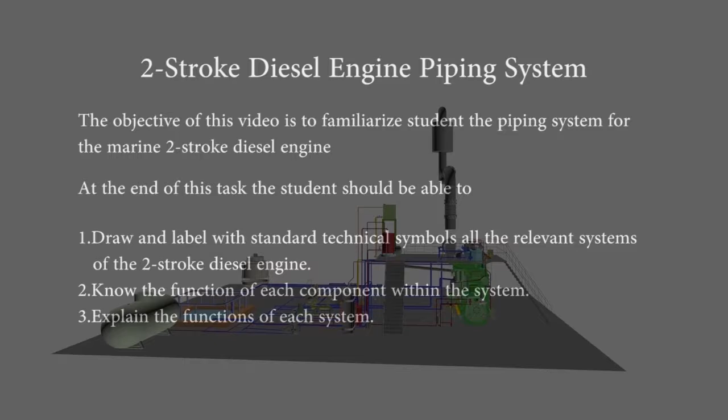Two-stroke diesel engine piping system. The objective of this video is to familiarize students with the piping system for the marine two-stroke diesel engine. At the end of this task the student should be able to: 1. Draw and label with standard technical symbols all the relevant systems of the two-stroke diesel engine. 2. Know the function of each component within the system. 3. Explain the functions of each system.

The two-stroke diesel engine consists of these systems: 1. The jacket cooling water system. 2. The fuel injection valve cooling system. 3. Main lubricating oil system. 4. Piston cooling system. 5. Rocker arm lubricating oil system. 6. Liner lubricating oil system. 7. Turbocharger lubricating oil system. 8. The fuel oil system. 9. Scavenge air system. 10. The starting air system. 11. Exhaust system.

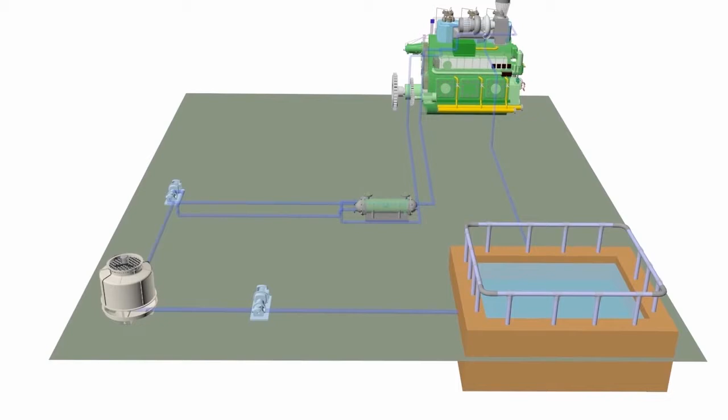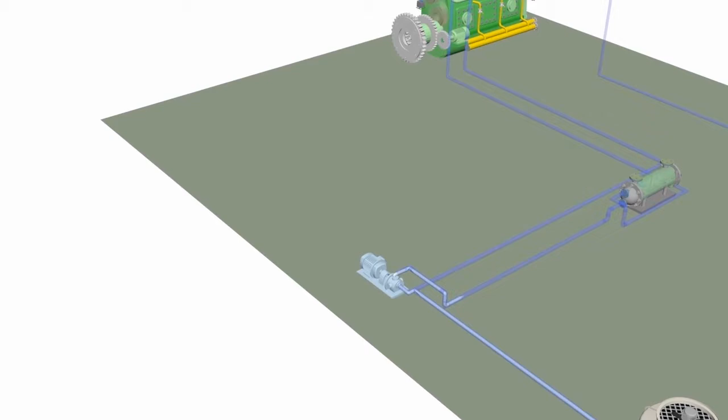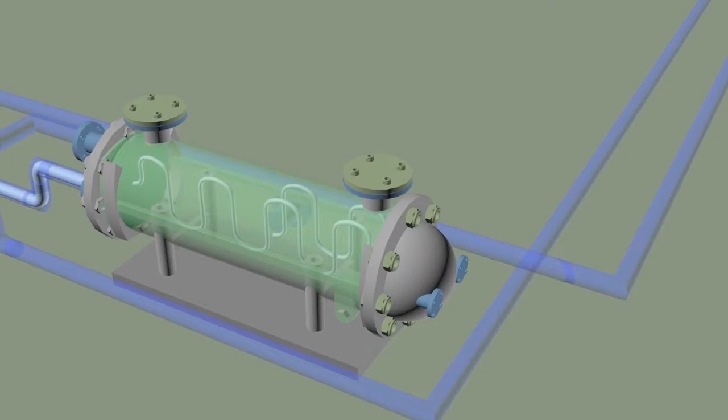The jacket cooling pump, of a centrifugal type, pumps the jacket cooling water to the L.O cooler where it cools down the lubricating oil of the main engine. The freshwater system also plays an important part in cooling the main engine jacket cooling system, where it will flow through the piping system through a manifold located behind the cylinders of the main engine.

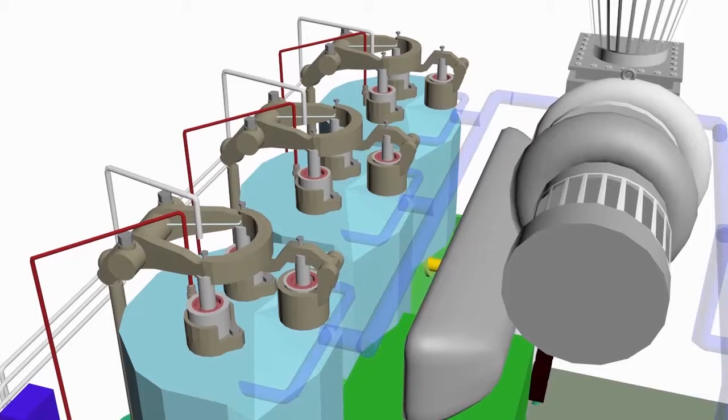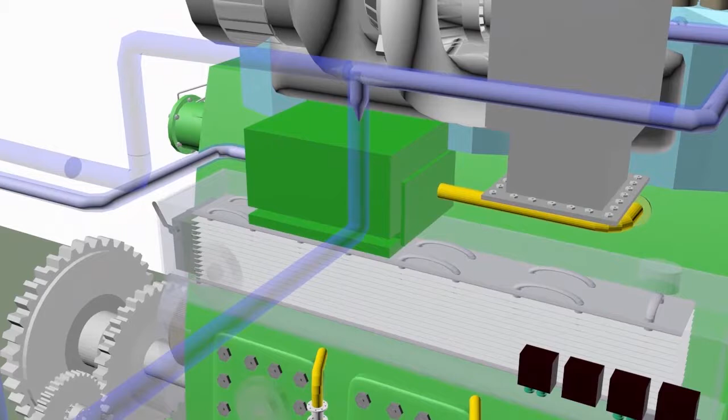It is then diverted to the cooling path of the liner, where it will flow to the cylinder head for cooling of the cylinder head system, then flow out to a series of ports, which then flow to the water reservoir, which completes the cycle. Apart from that, if the temperature is still cool enough for the system, it will return back to the suction line of the jacket cooling water pump. This temperature and pressure is monitored by various thermometers and pressure gauges.

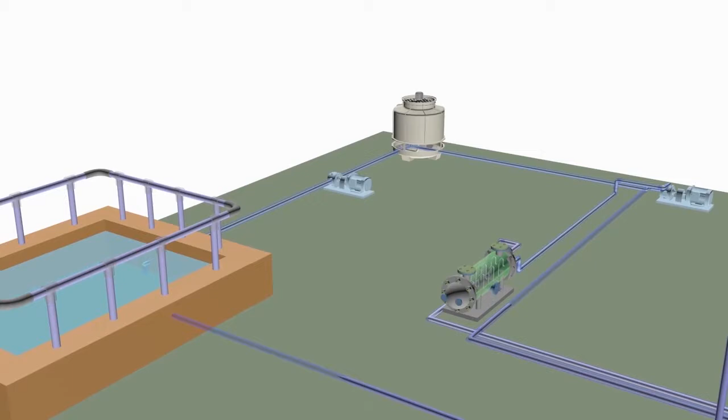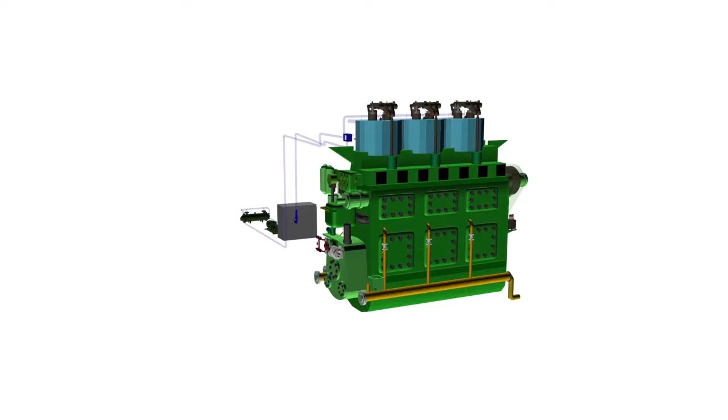Fuel injection valve cooling system. The fuel injection cooling unit is used for cooling the fuel injection nozzles of the diesel engine, to keep the diesel nozzle automatically and lastingly cooled by circulating water or oil through cooling passages. Heavy fuel injectors are fitted with water-cooled nozzles.

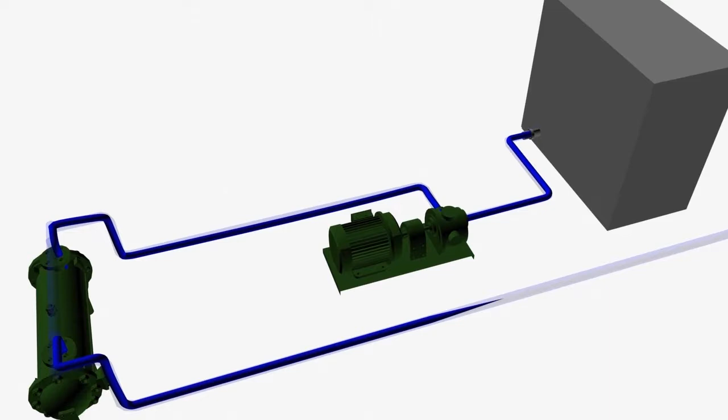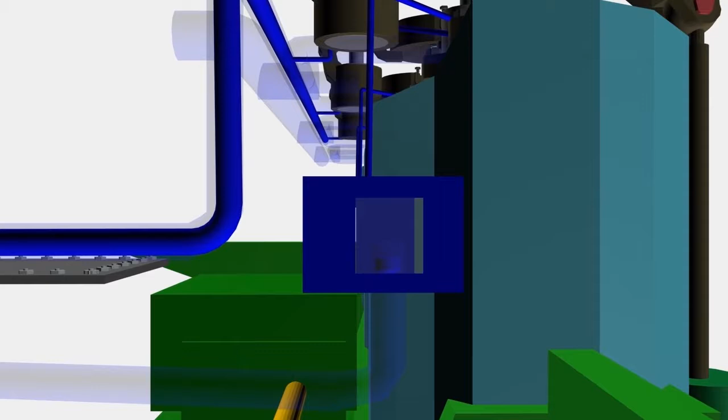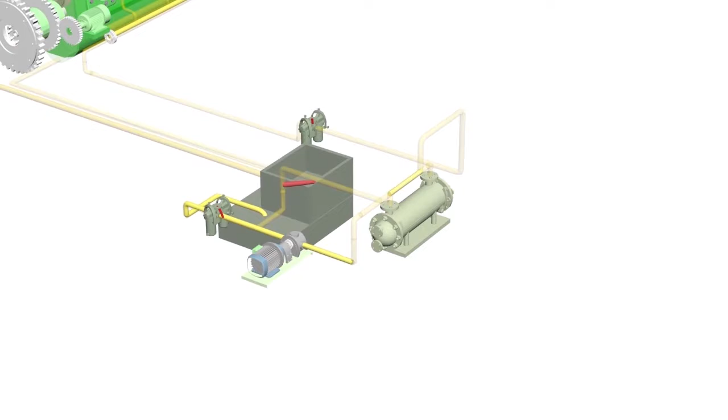Main lubricating oil system. The main lubricating oil system comes from the main engine lubricating oil sump tank. This oil in the sump tank is pumped by the gear pump through a series of filters, where it then goes to the lubricating oil cooler. This system is also fitted with an emergency lub oil pump to prime the lubricating oil so that it will fill the line before starting the main lubricating pump.

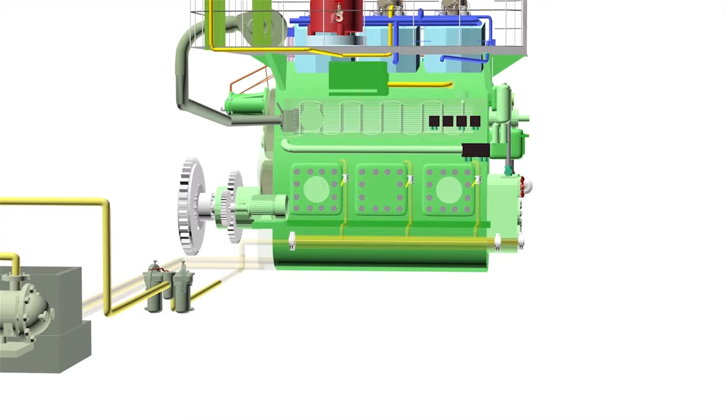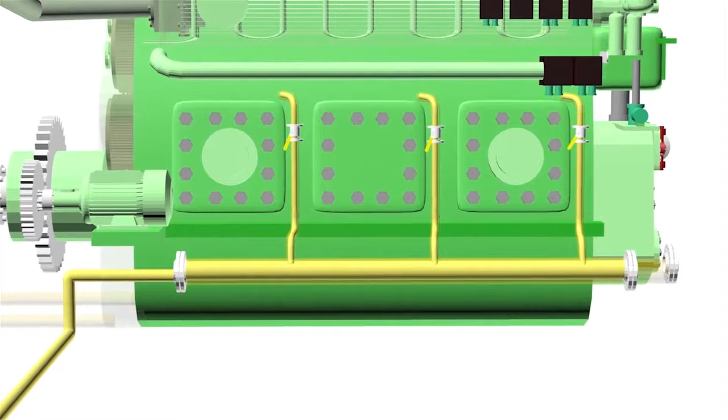When the lubricating oil enters the cooler, it will be cooled by the fresh water system that is used to cool the jacket cooling system. After passing the controlling valve, the oil will then be filtered by a second filter to ensure that any remaining particles are screened off. The oil is then passed to a main pipe where it will enter the main engine to lubricate the main bearings and crank pin bearings of the main engine.

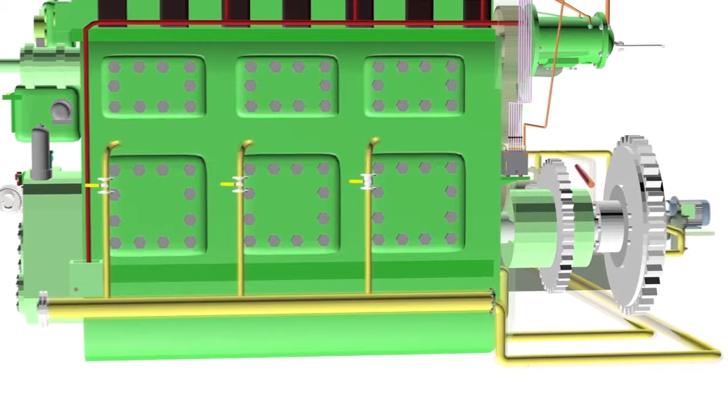It will then flow back by gravity to be collected in the dry sump tank, where a pipe will flow back to the main lubricating oil sump tank. Also, oil returns from the gearbox to the sump tank. Throughout the system the temperature is monitored by a series of thermometers, thermocouples and pressure sensors.

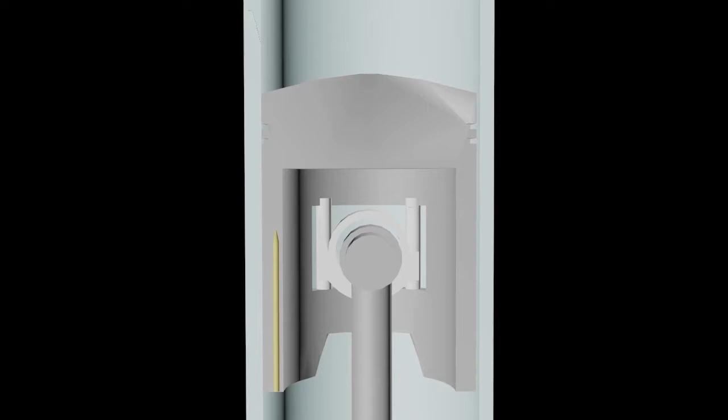Piston cooling system. The piston cooling system is used for cooling the piston crown to absorb heat incurred by the piston. The piston cooling system is a part of the lubricating system of the main engine. The lubricating oil which flows to the main engine lubrication system is diverted to a series of pipes where it enters the telescopic pipe from the underside of the piston.

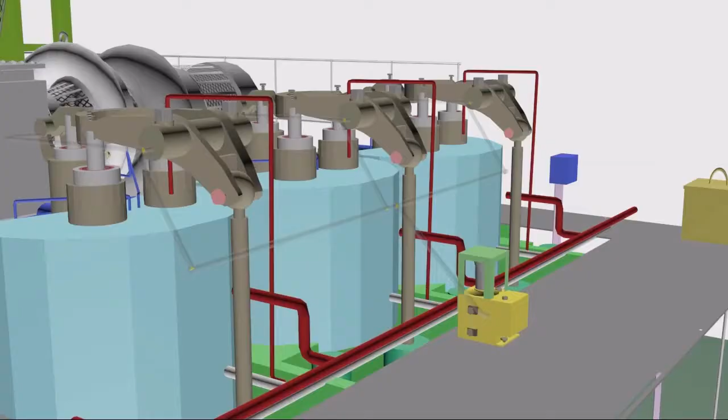Rocker arm lubricating system. The rocker arm lubrication is to provide fluent movement of the rocker arm by providing sufficient lubrication to moving parts such as push rods, bearing bushes, the push rod's ball ends, the rocker arm bearings and the ends of the valve stem.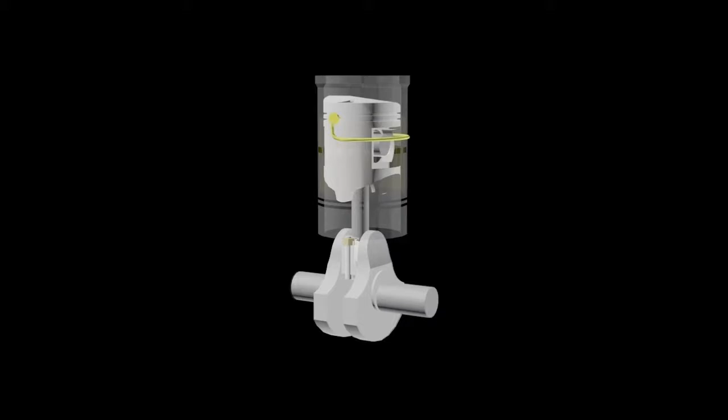The lubrication oil will be sprayed at the internal liner surface and the scraper ring, and will eventually be burned during the combustion.

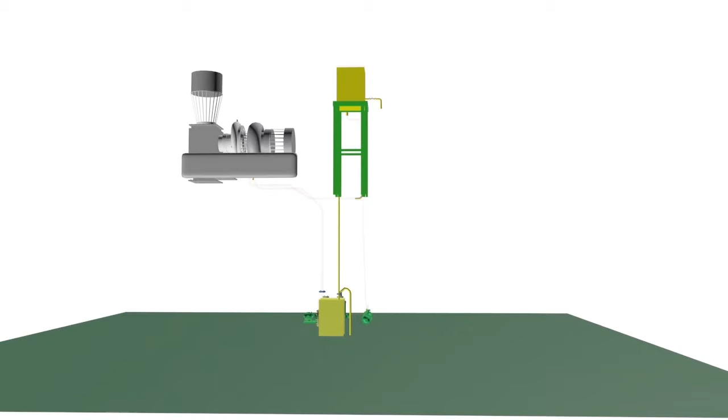Turbocharger lubricating oil system. The turbocharger lubrication is supplied either by an external or internal pumping system. The external system requires a positive displacement pump to supply oil from an external holding tank to lubricate the turbocharger bearings running at high speeds. It is very important that the lubricating oil is clean and free from metal particles that could scratch the bearings.

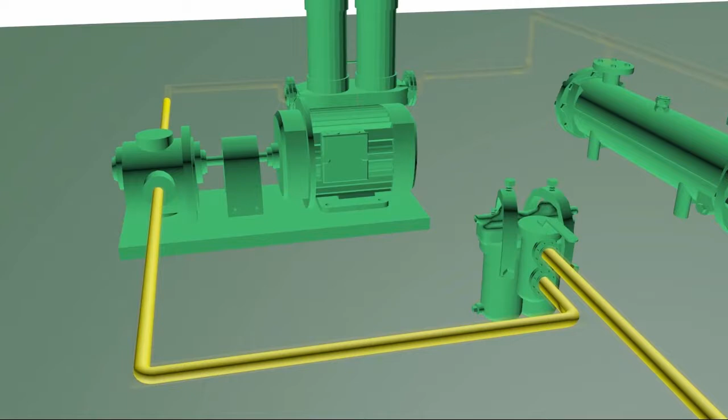The turbocharger lubricating oil system starts with oil from the overflow tank, which is pumped by a gear pump to a series of duplex filters of magnetic type. The system is fitted with a gravity tank high above the turbocharger to ensure that at all times oil will remain inside the pipe. This is to ensure that no air can ingress into the system, creating an airlock.

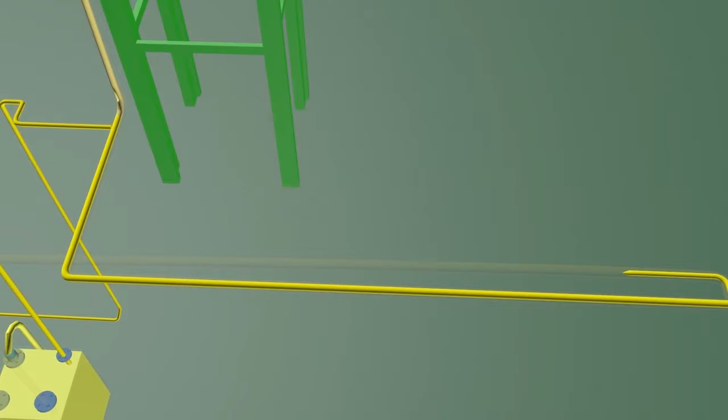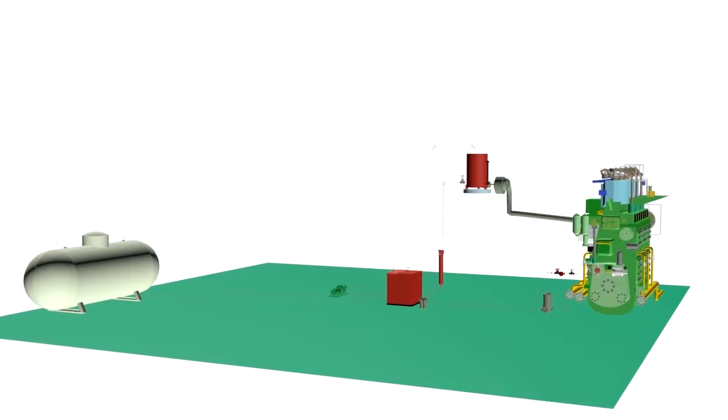Fuel oil system. Marine fuel quality can significantly affect the performance, operation and maintenance of the diesel engine. To better understand the important effect of diesel fuels on the engine itself, it is important to have a basic understanding of fuel characteristics, properties and contaminants which impact the operation of a diesel engine and its fuel handling and

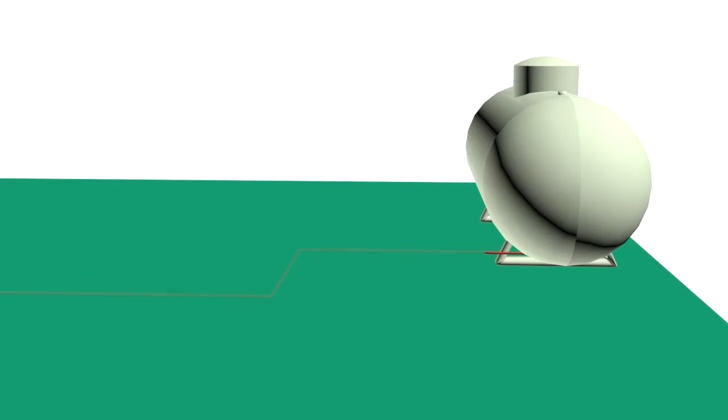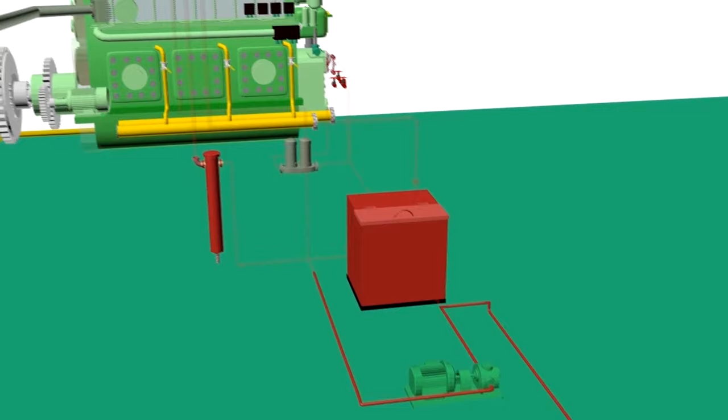fuel treatment systems. The fuel oil system for a diesel engine can be considered in two parts, which are the fuel supply and the fuel injection systems. The fuel supply of this plant starts from the fuel oil storage tank, where it will be transferred via a fuel oil transfer pump to a gravitational fuel oil service tank.

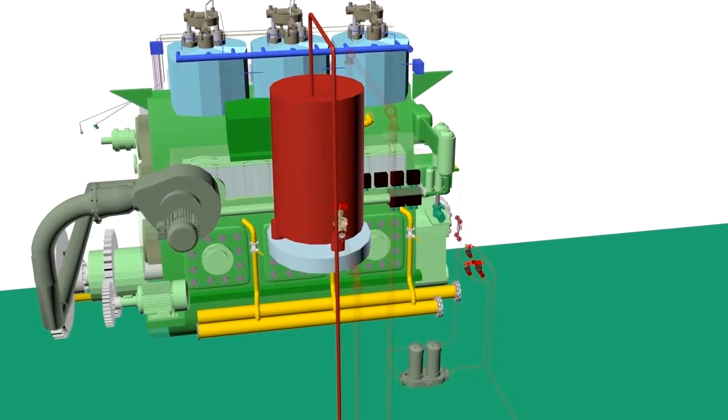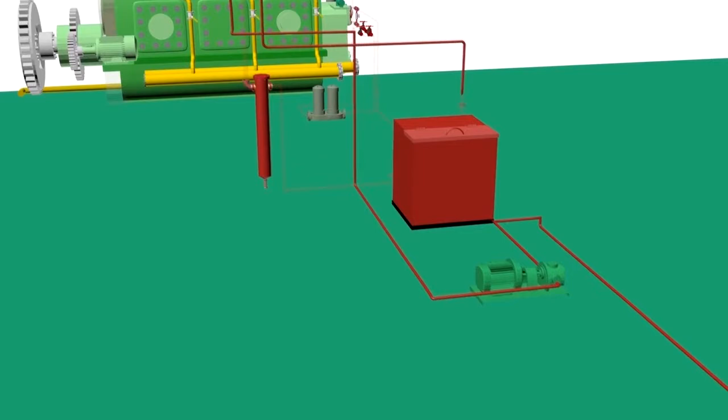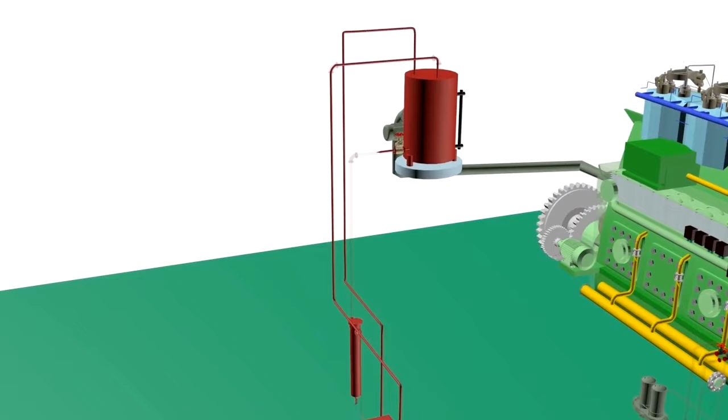In the event that the fuel oil is high, it is found in the sight glass. Overflow pipes are fitted to direct the excess oil back to the oil overflow tanks. The system starts when fuel from the service tank flows down by gravity to a deaerator which separates the fluid and air to prevent airlock of the system.

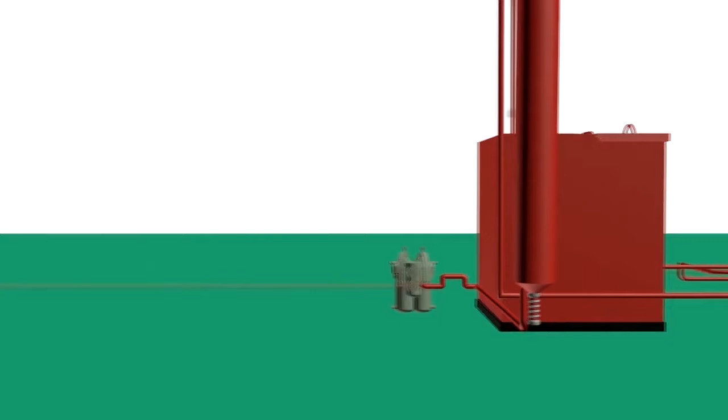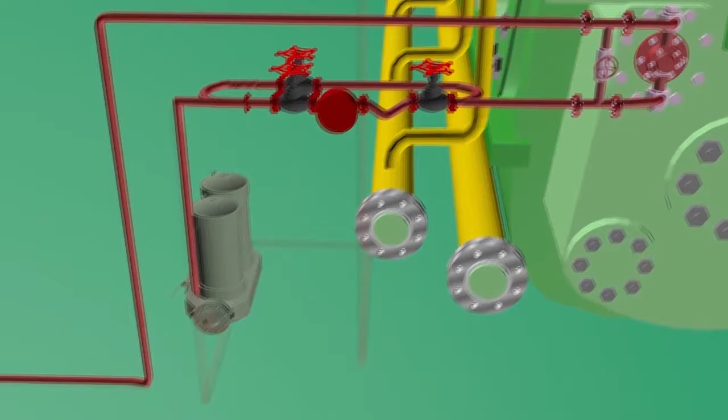During operation the oil is pumped by a gear pump which is attached to the main engine, driven by a set of running gear through the main engine gearing system. Fuel oil will then pass through a series of duplex strainers to clean any particle matter that could choke the fuel injector. After passing through the service pump it will pass through a flow meter where fuel consumption is monitored. A second duplex cleans the fine metal and sludge from the fuel oil system.

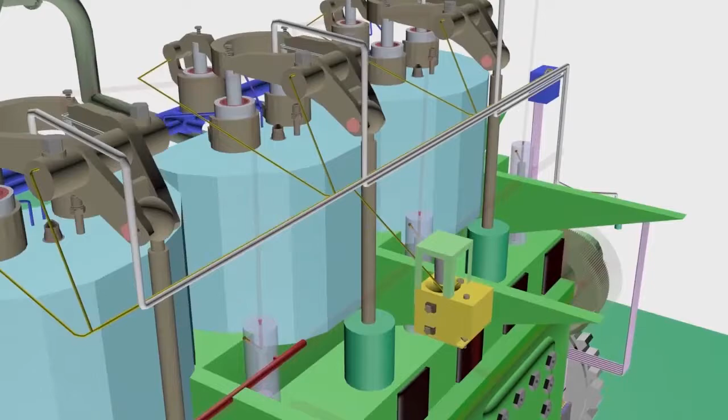This oil will then pass to the fuel injection pump where the pressure will be raised to the fuel injection valve located in the center of the cylinder head. The fuel injection pump is operated by a set of camshafts driven by the gearing system at the end of the engine chain drive. This pump is controlled and regulated by the governor through a series of linkages that set the amount of fuel supplied to the injector, and as a result the speed of the engine.

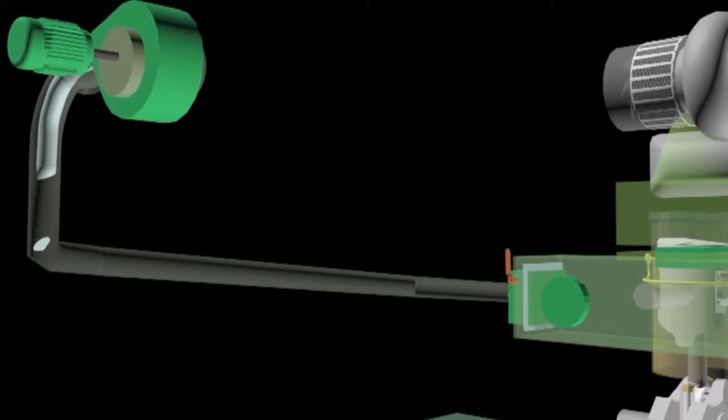Scavenge air system. Scavenge air is provided by an auxiliary blower when the engine is running at slow speed. The auxiliary blower, driven by a motor at high speed, delivers air to a damper, which then will enter the scavenge space before it enters the scavenge port. After passing the port, the air will mix with fuel in the combustion space inside the cylinder and burn to produce power to drive the engine.

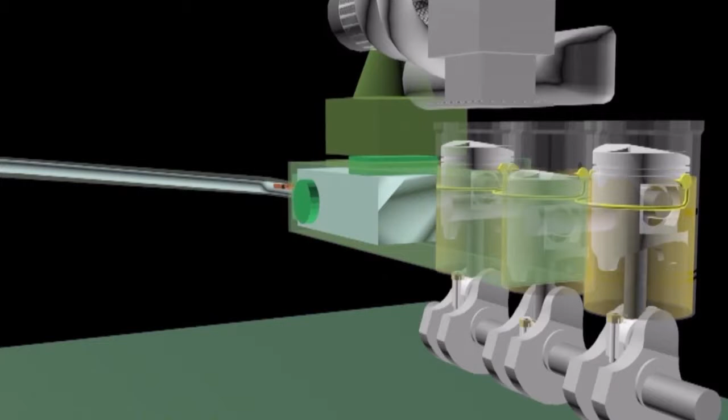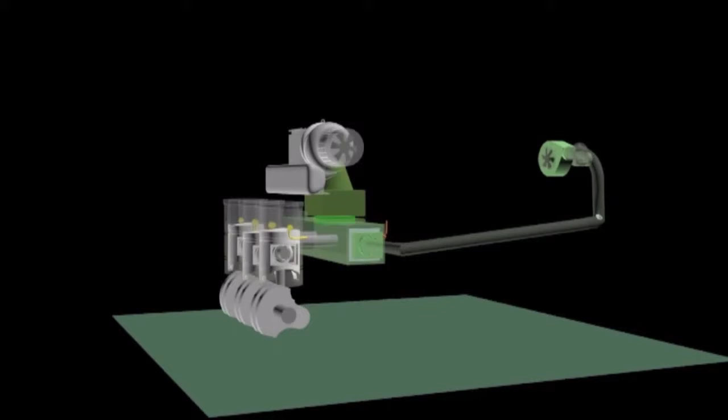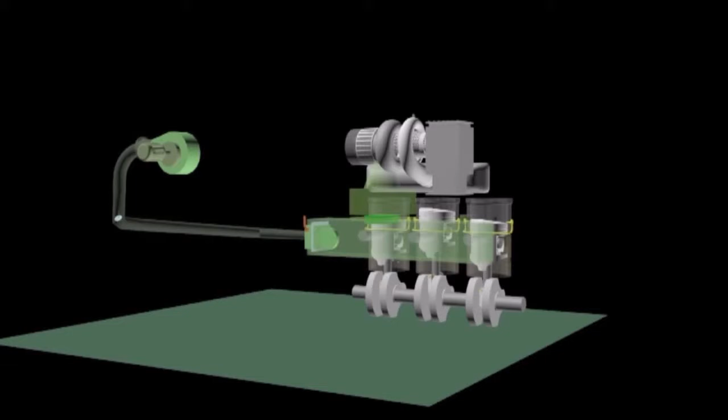After the engine has reached a constant speed, the duty of the auxiliary blower will be taken over by the turbocharger that draws air through a filter and compresses it into the air cooler, where the air will be cooled before it enters the scavenge space. The reason for cooling the air from the turbocharger is that when it is running at high speed compressing the air, the temperature will rise and cause the scavenge air to expand. The expansion of the air will make it inadequate for combustion in the cylinder and will result in incomplete combustion.

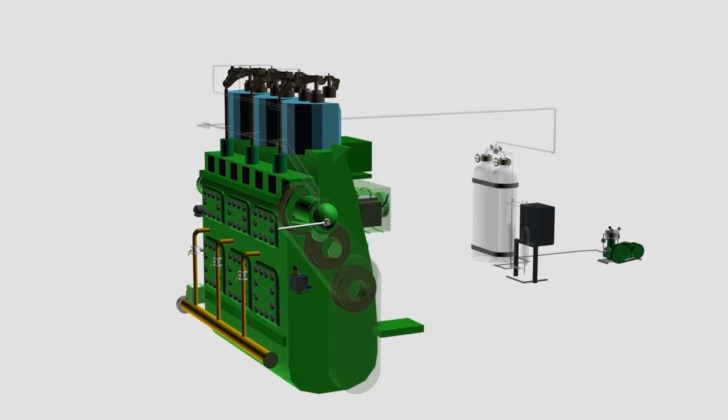Starting air system. Large marine diesel engines are started using high-pressure compressed air. The air is admitted into the cylinder when the piston is just past TDC and continues until just before the exhaust valve opens. There is always more than one air starting valve open, a situation known as overlap. This ensures that the engine will start in any position.

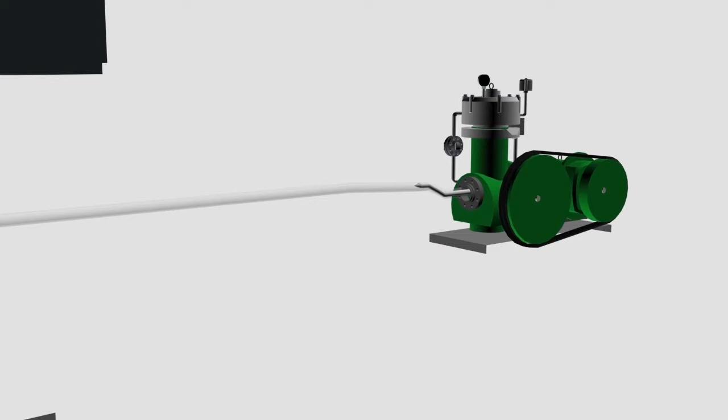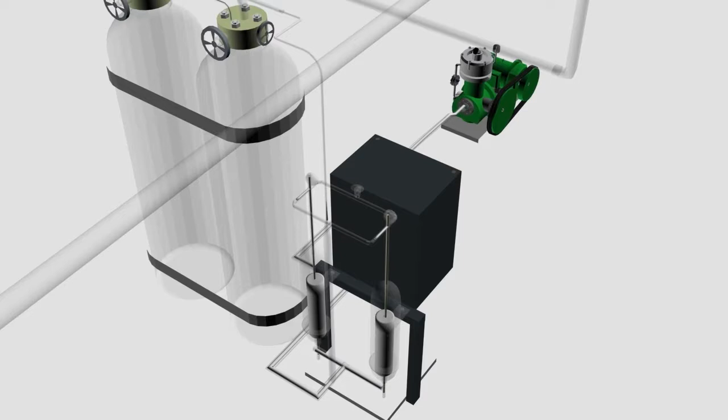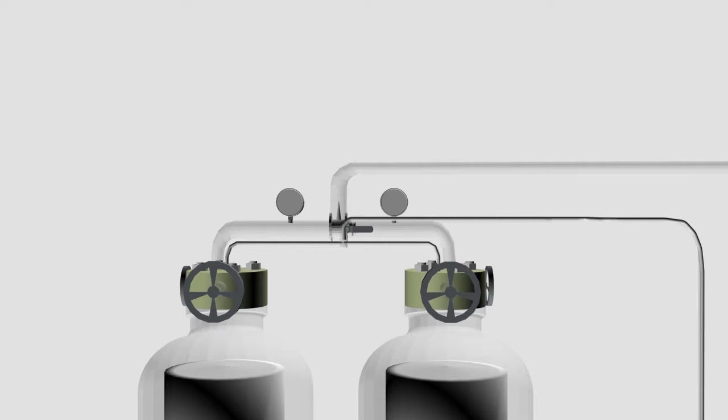The starting air of this plant starts from the two-stage air compressor that compresses high-pressure air to the air dryer, and it is stored in two air bottles. To start the engine, air will be supplied to the isolating valve through a main starting air valve fitted at the air bottle. The isolating valve is fitted to prevent starting air line explosion due to a faulty starting air valve. After passing the isolating valve, it will be divided into two flow paths.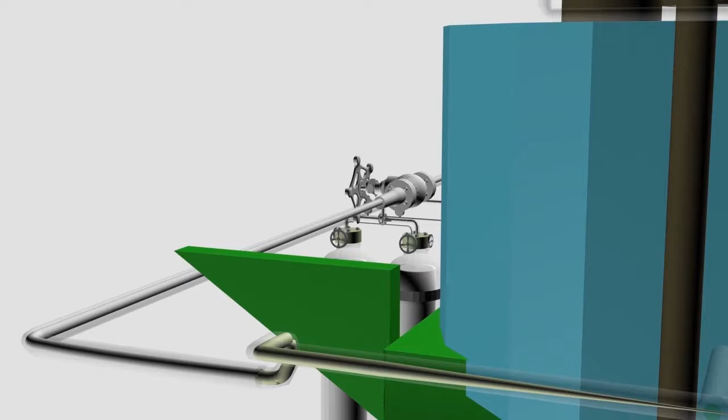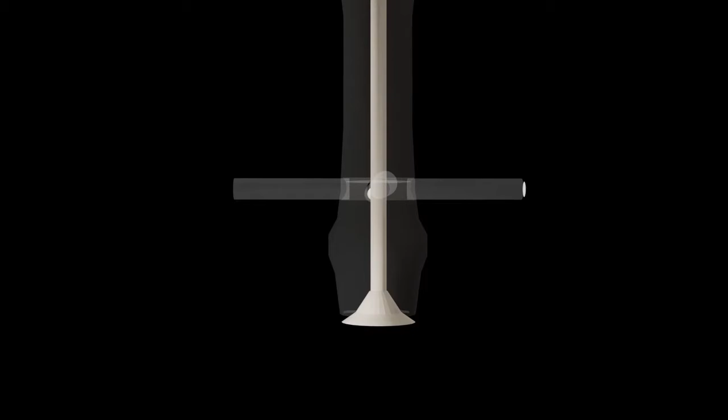One, which is the main starting air, will be ready just before the entrance to the starting air valve fitted to the cylinder head, while the other will go through the distributor that correctly times the unit that will first start the engine. It will then direct pilot air to the starting air valve that will let the main starting air enter the designated cylinders.

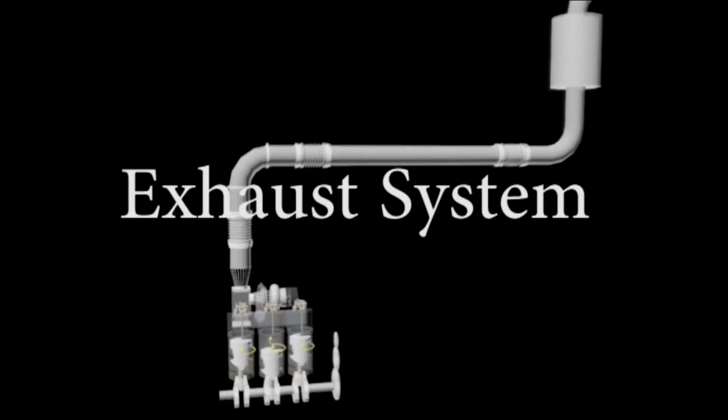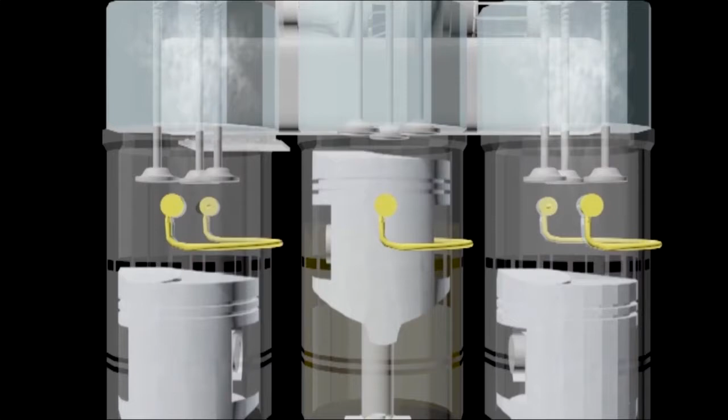Exhaust system. Exhaust comes from combustion of fuel and air inside the combustion chamber. In this plant, the exhaust gas of the combustion chamber is removed through the exhaust valve driven by a rocker arm that has been pushed by a push rod from the camshaft. The high pressure exhaust gas that is removed by the uniflow method will then enter the exhaust manifold, where the pressure and temperature will equalize.

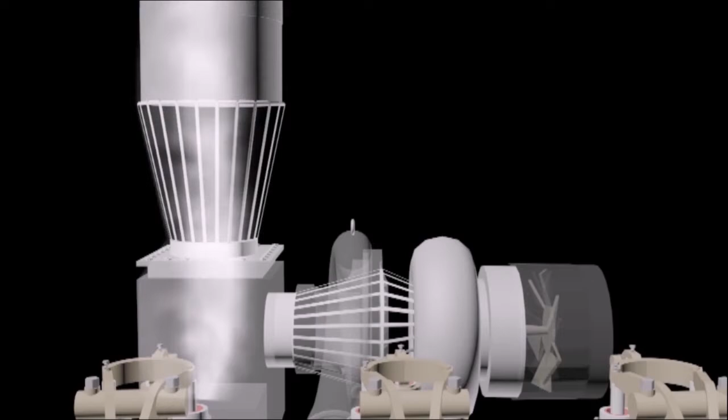This exhaust gas will then flow to the turbine side of the turbocharger, where the high pressure hot gas of the main engine will drive the turbocharger. This results in a high rotational speed of the turbine and thus also of the blower of the turbocharger.

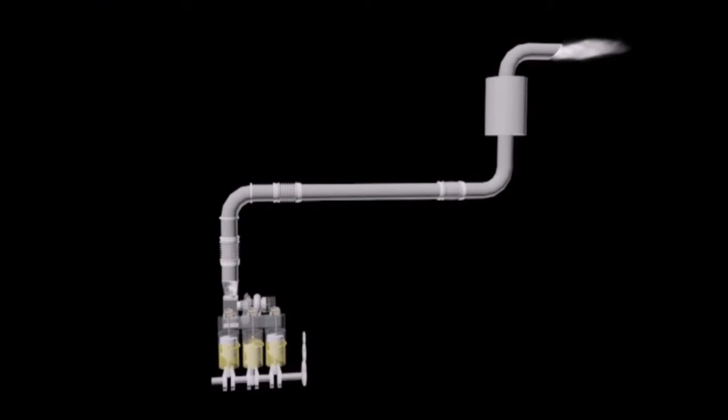Conclusion. After studying this system, students can prepare themselves before and during practical work on the two-stroke diesel engine with appropriate knowledge and skills.